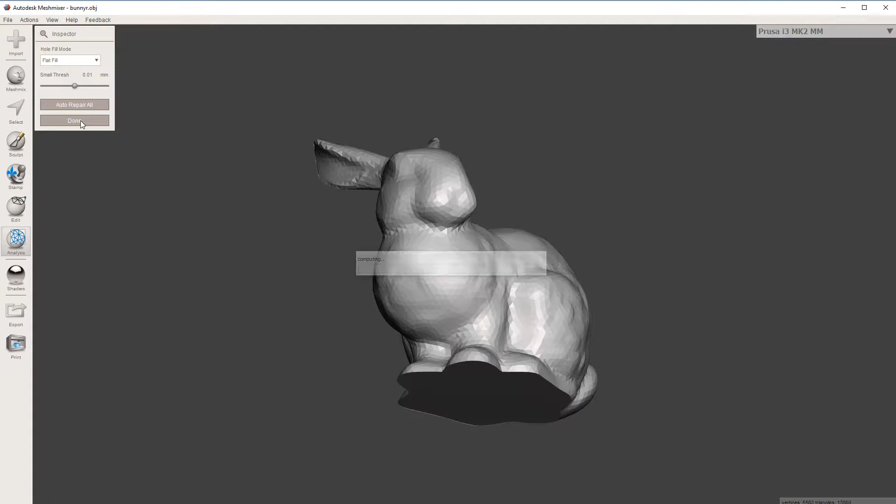Which was a Meshmixer question. So this Meshmixer question was kind of interesting, and one that I actually deal with quite a bit - how to align separate parts. So I'm going to take this part of the bunny right here, and rotate this and move it, and generally kind of totally mess it up in terms of where it is in 3D space. Now, a lot of times it's kind of very difficult to put things back together, but I want to show some tips and tricks on how to do some alignment when you have meshes that are in different places. Oh, actually, I'm not sharing my screen yet, but I will.

The reason this came up is we got a question about 3D scanning. Sometimes when you 3D scan things, the 3D scanning software creates different kinds of shells. It's the job of the software, whether it's fancy scanner software or something like MeshLab, to make sure the skins are nice and flat like this. But sometimes the skins are off and no matter how you scan or post-process it, they're not aligned - they should blend in like this, but they're not. They're kind of off. So how to get those down and perfectly centered on each other is what we're going to go into right here.

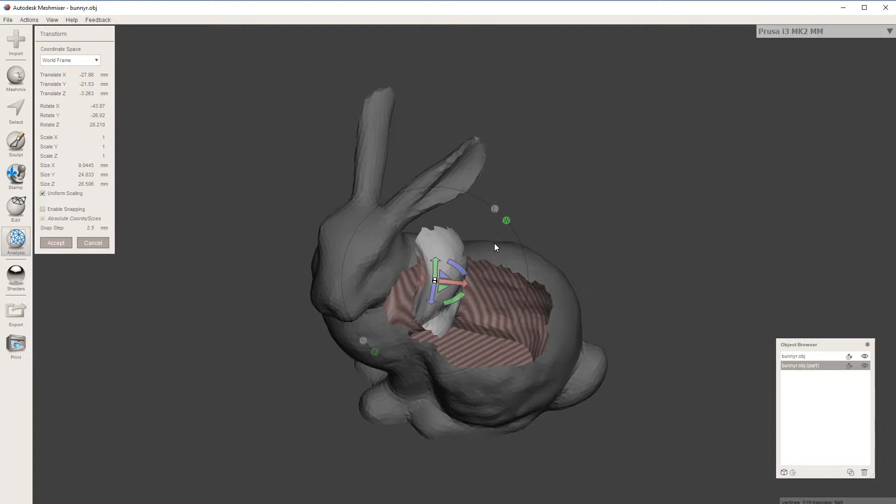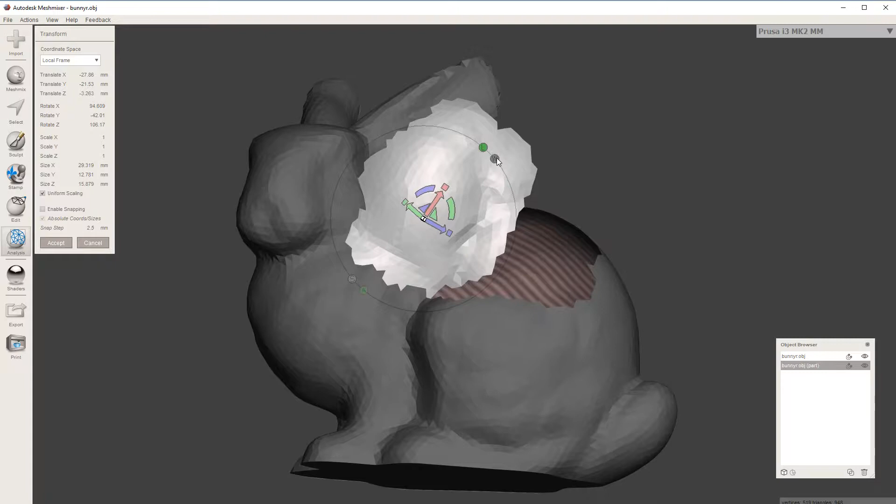A lot of this is because of the rotation system - even with world, the W, or L for local, your rotation systems are kind of off. Say I want to rotate this down - I'm looking at this bunny like this and I want to rotate it clockwise, but I'm not given the option of clockwise. It's only clockwise from this vantage point, but it's not working. If I go world, I get that, right?

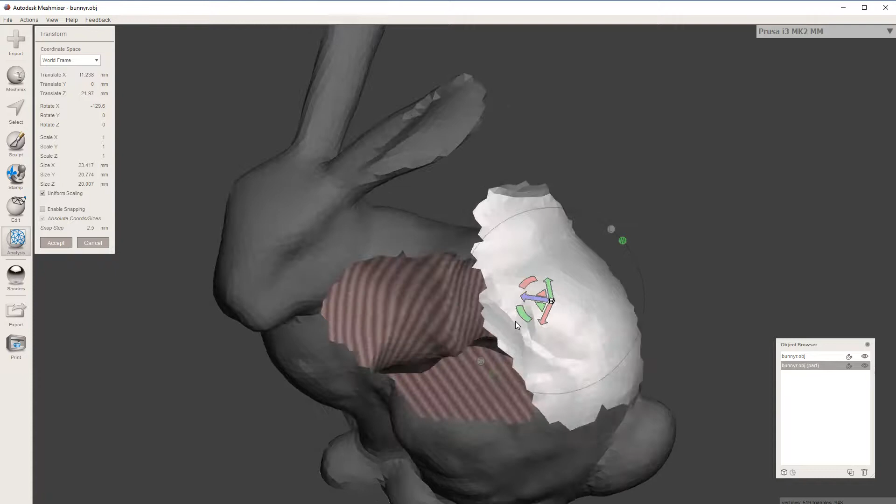Let's mess up the world to make this a little bit harder. Okay, right here, I try to do it and world doesn't work, right? It's kind of going into the wrong place. So the trick here is that you want to orient it vaguely in the right way, but you don't even really have to do that. What you want to do is, this is all about pivots.

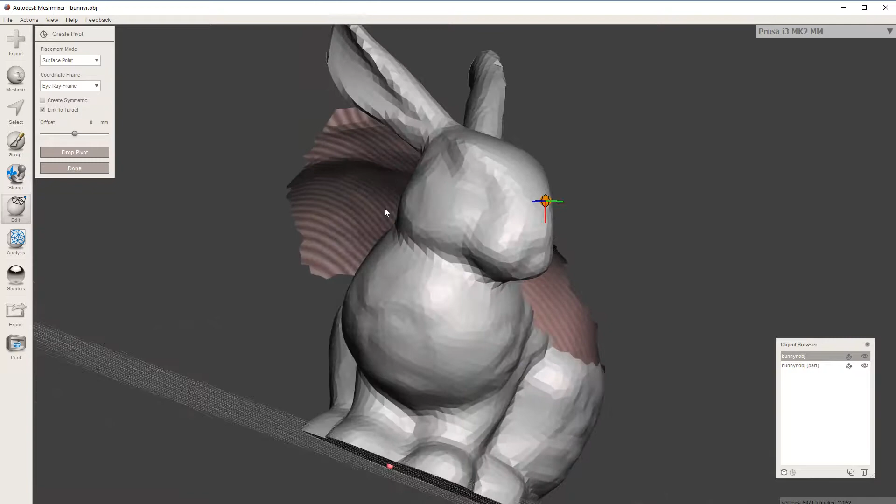So I'm going to go on the bunny and go to Edit to create pivot right here. The trick to this is that no matter where the bunny is - let me show the grid - no matter where it is, if it's on the grid, turned, or weird, you can use this trick: surface point, eye ray frame. So what this does, if I just click, I'm not actually placing a pivot, but as I click and rotate, this pivot, this green line, is pointing up. What this really means is wherever I click, that green line is pointing right towards me or you right now. As I rotate around, you can see it was pointing right where I was looking.

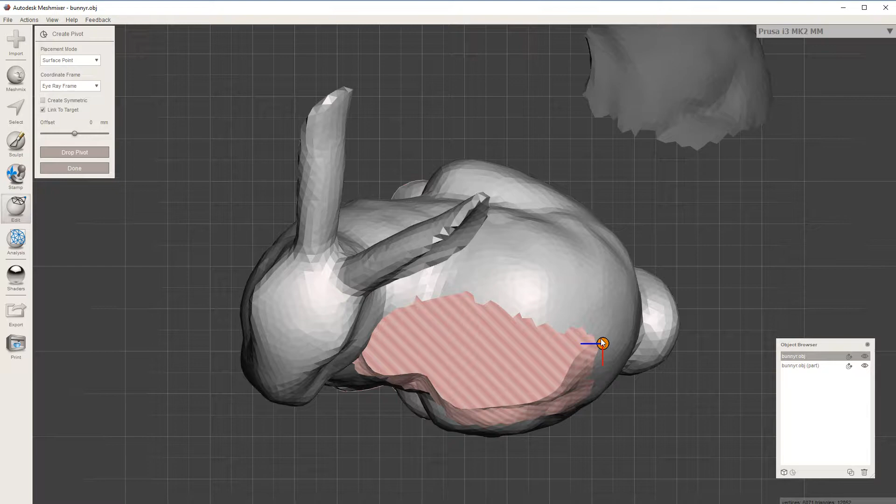So you can use that. You can say, well, I don't really know where the bunny is oriented, but right here on the back, I'm going to try to get it as straight up as I can. Another trick with this is to make sure snap is turned on. What that does is it will snap right there, bam, to the top. So what I'm going to do when I double click right now is create - you can kind of see a little bit here on the right hand side - this green line is facing absolutely up.

Now that is not up to where the bunny is, it is up to the grid right here. So that's great. I'm going to do the same thing for this piece, switch over here, move right over it, double click right on the back, go to edit, create pivot, surface point, eye ray frame, and link to target is very important to have, and double click.

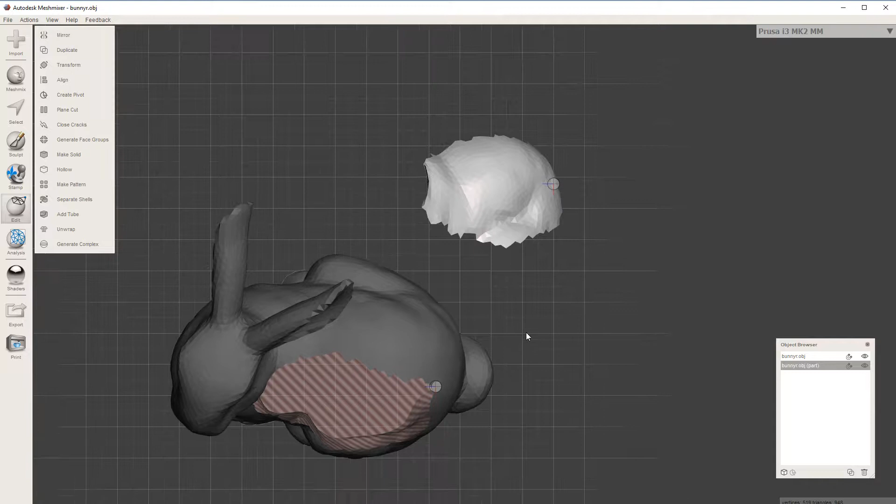Awesome, so now we have two pivots right here. You can also list the pivots if you look down on the right by clicking this little thing. These are pivots, so you can name them and all that. You can drag, if you're just clicking and dragging, you can drag pivot to pivot. So now those two things are absolutely matched, right? Those pivots are right on top of each other.

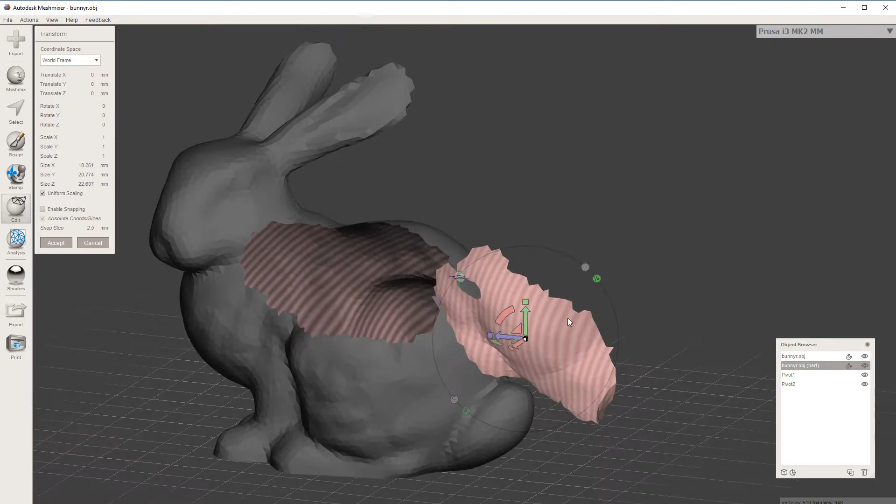The bunny is not right yet, but we'll get to that. If we click on this bunny part right here and click T for transform, you can see that the center of where this is moving is the center of this object. But that's not what we want. We don't want to rotate it around the center. What we can actually do is click on this pivot, and now this object is pivoting around that pivot point.

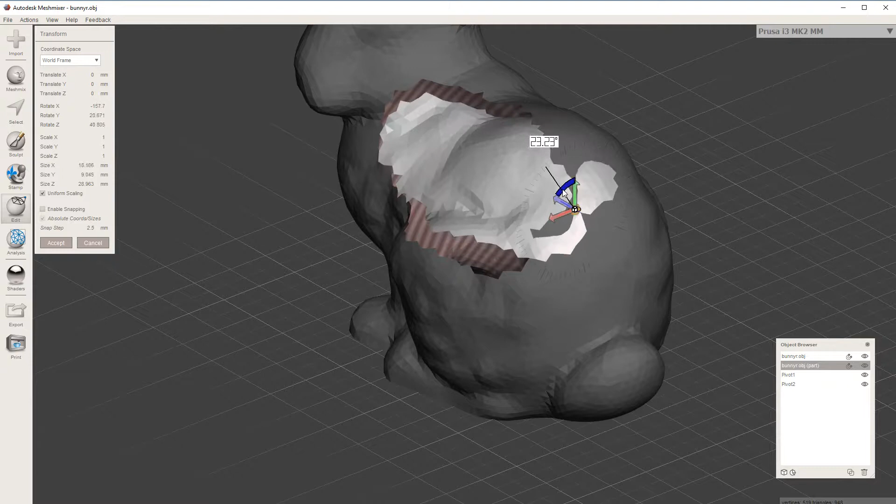So now we're up here, and you can see that because this is a world frame and I'm still on snapping, I can use this as a way of rotating this object much more accurately than I was able to before. I'm not saying I did this perfectly accurately, but it's a lot easier to move this now than it was before. And then once you get close, there are other tools inside Meshmixer you can use to really align this. But this is a darn sight better than I was able to do before, because of that center of rotation type of thing.

And now you notice that the pivot point is actually becoming a little liability because I'm not able to rotate it from the right place. I can always go and just create another pivot. Create pivot right here, and say I want it right there on the bunny, and hit T for transform, and then click on that pivot. And now I'm pivoting it from right there, or transforming it from right there.

Like that, and I've got it most of the way there, right? I can use some other tools now to do some bridging if I wanted to really bring that in, or if I want to be methodical about this, I can select both of these, hit combine. That's pretty good. And then click one side, click the other side, go to edit, bridge. It's created a little bridge there, as you can see.

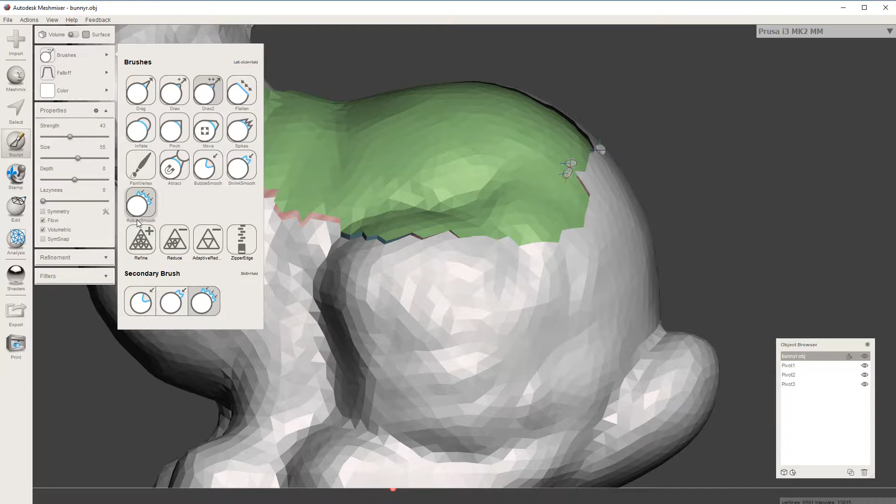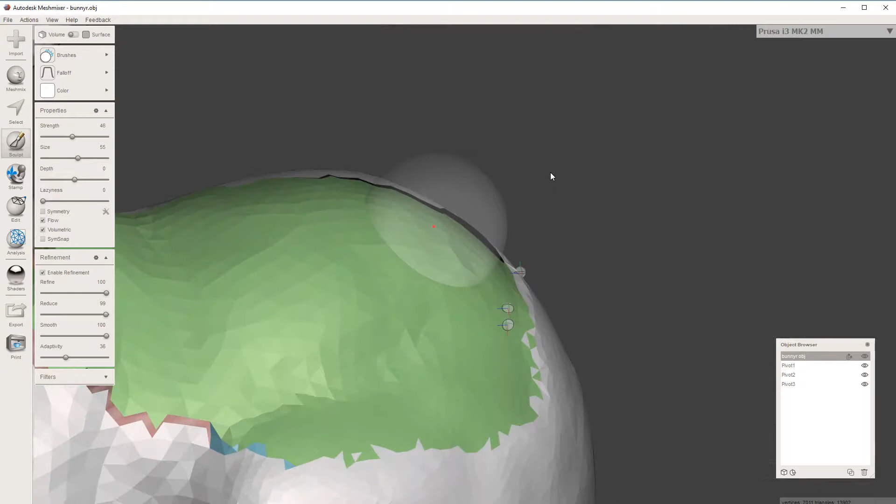And then one of my favorite tools for this is to go in with the robust smooth tool, with refinement turned up and reduction turned up. Watch this magic, I love this. This is kind of zippering those two edges together. You can kind of see they're broken, but the robust smooth is joining those two together.

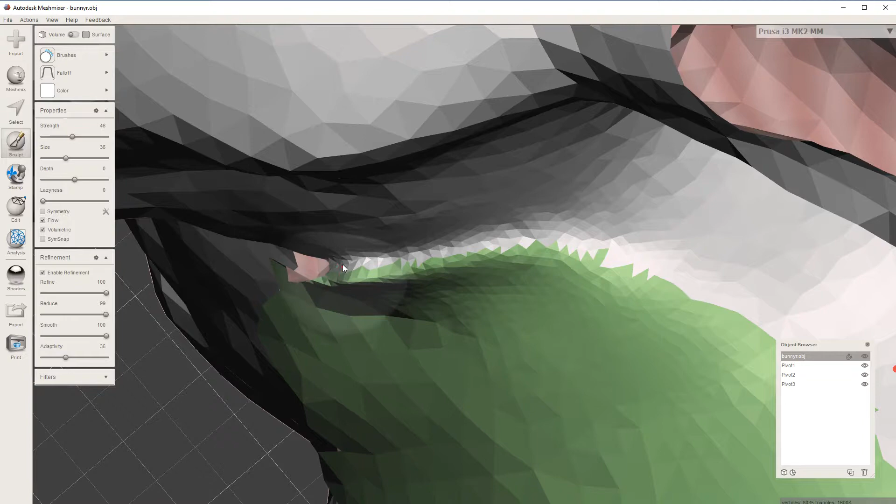I might want to make this a little bit smaller up here. It's a little more curved right here, so the tool has to think a little more on that, but it's getting there. In this, you want to make sure your brush is not too small to jump that gap, so you want to make your brush larger than that gap between the two sides, and it's just kind of zippering those two up like that.

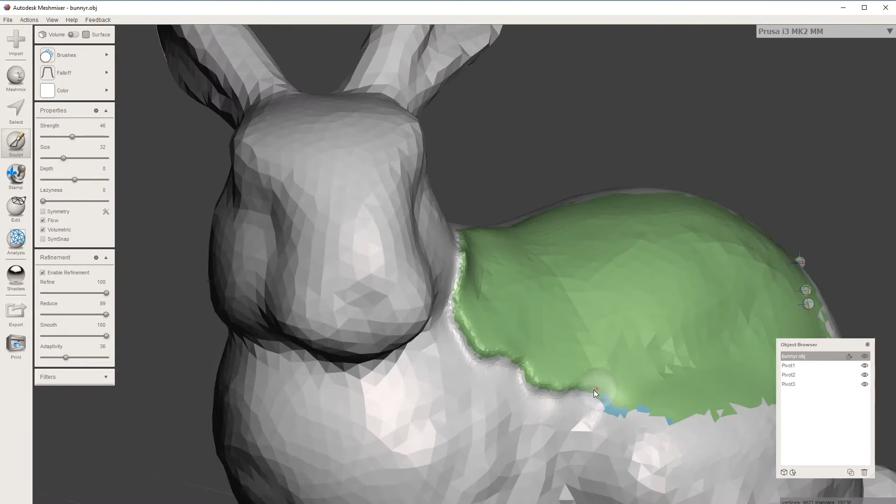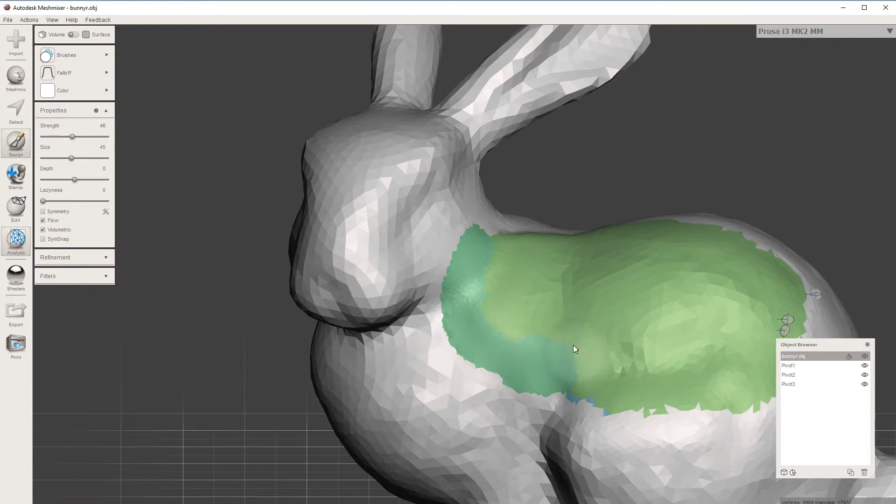Now if we look in the inspector, there's one tiny hole that we just fixed. There's some issues right there, but we can do smoothing in a couple different ways. Actually, a good way to get rid of this ridge is maybe just to select it, delete it, and fill it. Kind of nice. And then we can go back to the smooth tool to really smooth that out, like that. And it's pretty much back to where it was.

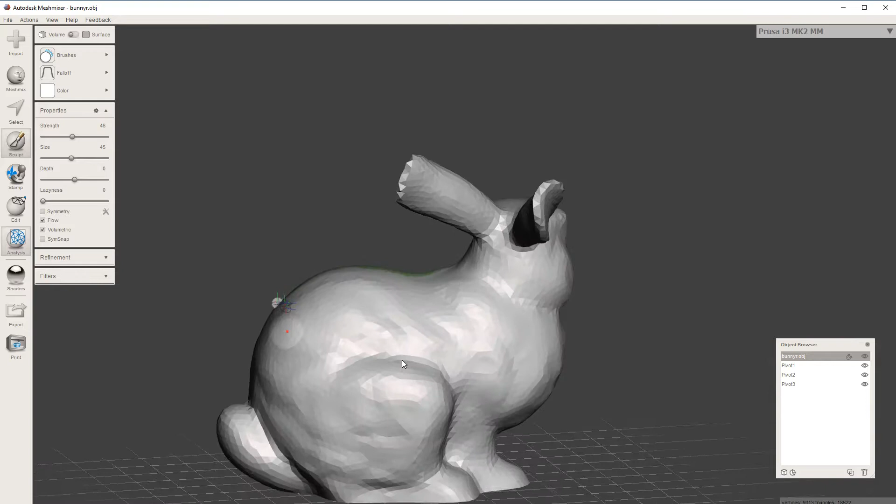So if we have something like this that I have separated out, I'll transform it a tiny bit away, and then bring that back into the bunny. Okay, now let me turn off the grid.

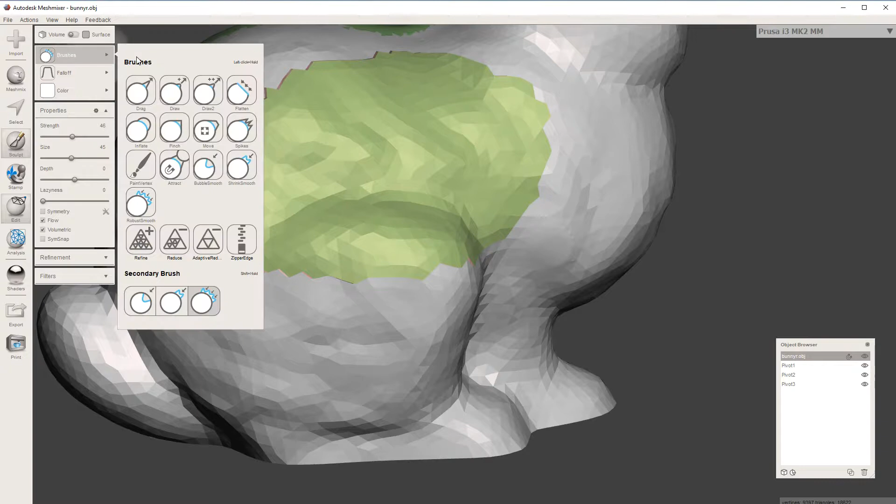Right now this is completely disconnected. If I try to go in with the robust smooth tool on both of these, it doesn't do anything - it just robust smooths this side, and actually looks like it hit the other side as well. So the way I did this is I selected one side and selected another, and then I went to edit and bridge.

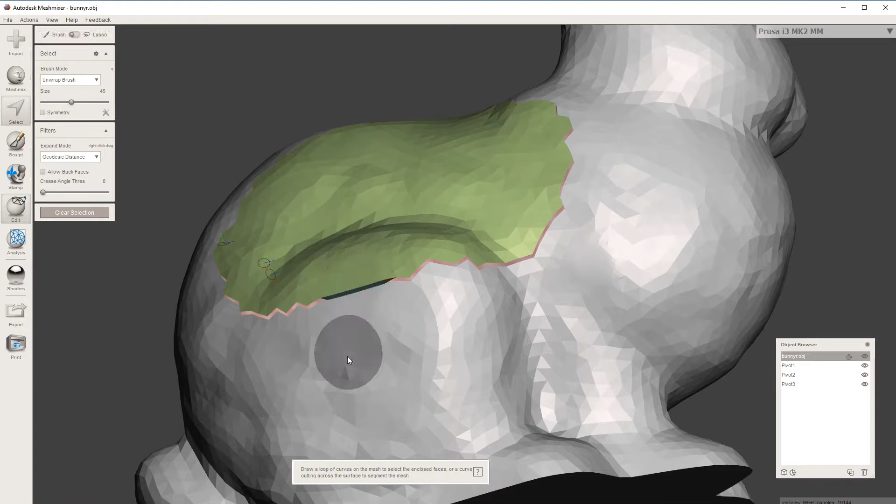Now that this has a start right there, if we turn on wireframe, now that it's the start of a connection there, the robust smooth tool will go do its little zipper thing, like that.

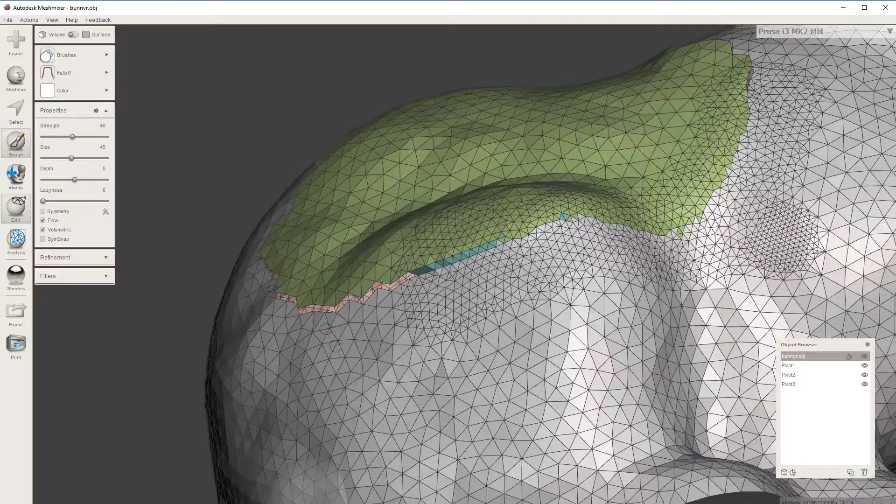So the robust smooth tool is - actually I can show you this way. If I go back here, it's not just the robust smooth tool, it's really any tool. If you go to draw like this, right? So draw creates volume, right?

But you see the draw tool is zippering that up as well. If you turn down the strength to 0, but refinement and reduction is still on - oh, it actually doesn't. Maybe just like a strength of 1. It'll actually start to do it, but you can see it's also adding volume at the same time.

So really all of the tools will do this if refine and reduction is on. That's what it does - it kind of fixes that gap in there. It's just that right now it's doing it while it's creating volume.

If I hold the control key, let me turn up the strength, that is undrawing, right? It's going away from you. You could do the same thing - you could undraw at the same time as zippering, and you're creating kind of a canyon right there.

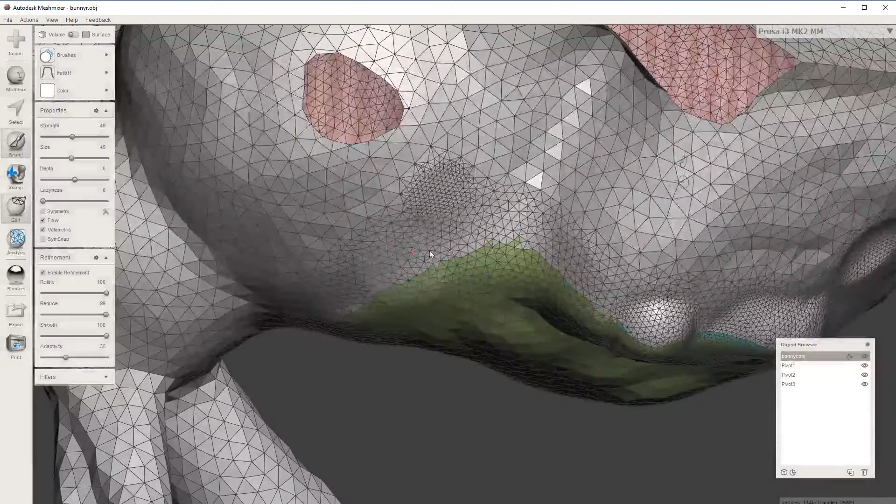But usually when you're doing this, you kind of want to do one thing at a time. So that's why I use the robust smooth tool - because it kind of averages out the ups and downs around the tool. So it's a really good way of zippering that without changing the geometry too egregiously, if that makes sense.

Good, so I hope that answered the question. That question was from Chris last month, so hopefully that helps you, Chris.

I also want to show you that we got a question, unfortunately, that I'm not going to be able to answer. Let me show you the thing here. Let me go into Thingiverse - I'm not sure if it's still on the front page or not. It is not.

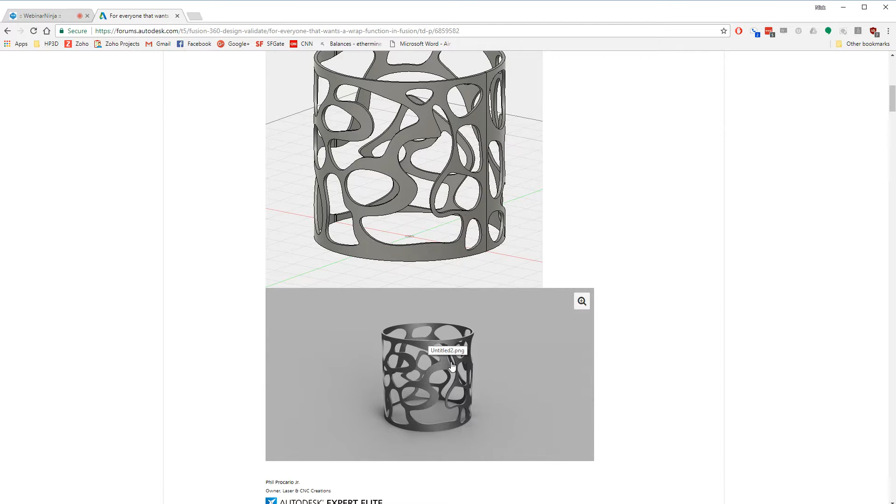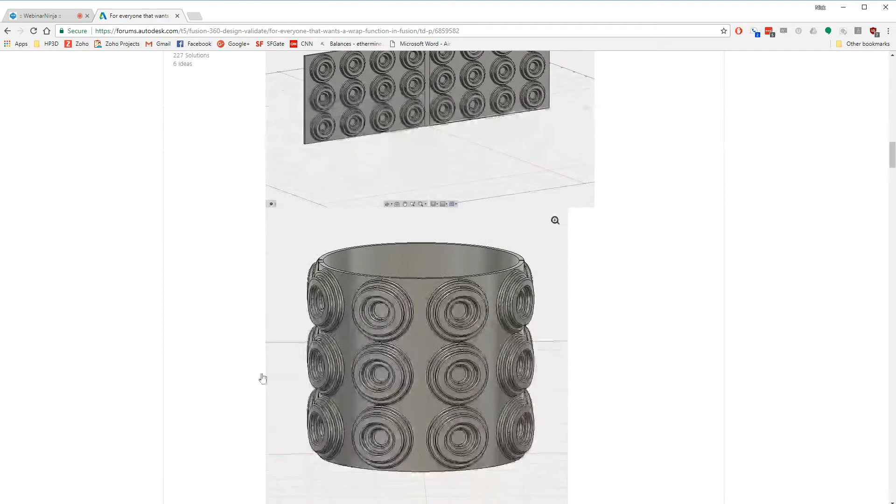Super, super easily — all this is, in the sheet metal workspace, is just a sketch drawn with splines and all of that, then cut out, but unfolded and refolded. If we go down, something like this is another example, just a sketch with different extrusions on it that turns into that. We've never been able to do anything like that inside Fusion before. Again, like this geometric pattern. But this only works with things that work with sheet metal. If you wanted this to be like a weird wavy piece of metal, it's still very difficult.

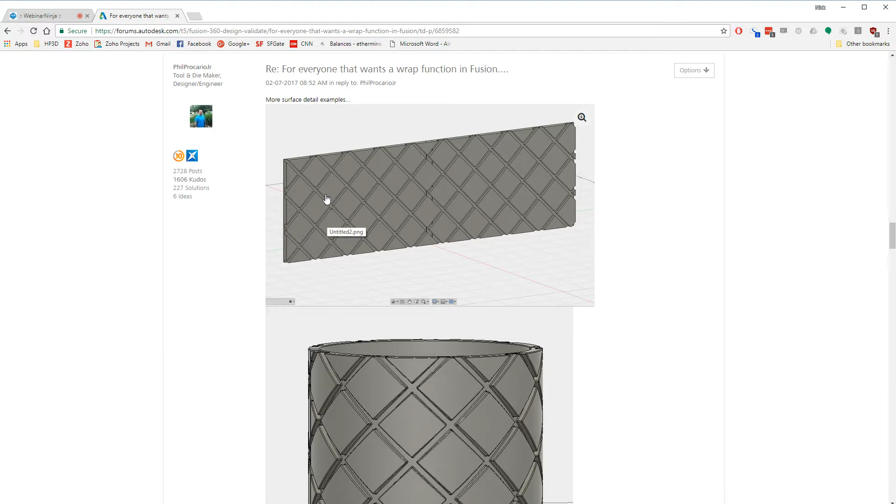I want to show you another example of this down here.

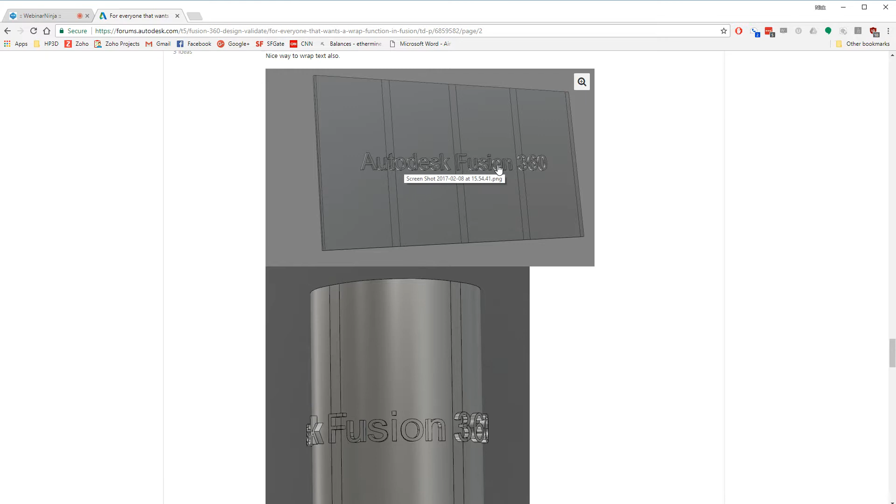There's one really interesting one that was done. A lot of cool things on this thread, but I want to show you, and this is doing the wrap all the way around. That's pretty easy. And actually how to create a kind of helix all the way around. This is very cool as well, and there's a lot of things you can do with this, but I want to show you very specifically one of these inside of here.

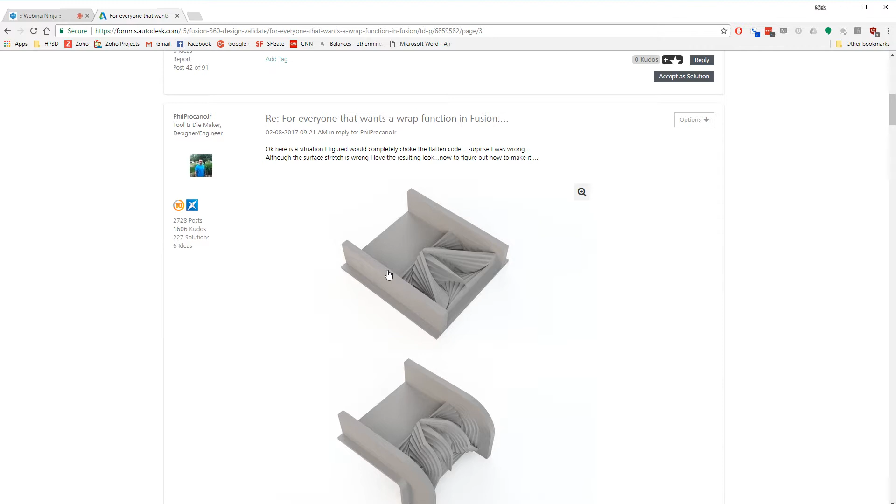Yeah, so something like this. This was created as something done in sheet metal, but it actually bent this shape around a curve, a very complex shape. If I can, I guess I can't.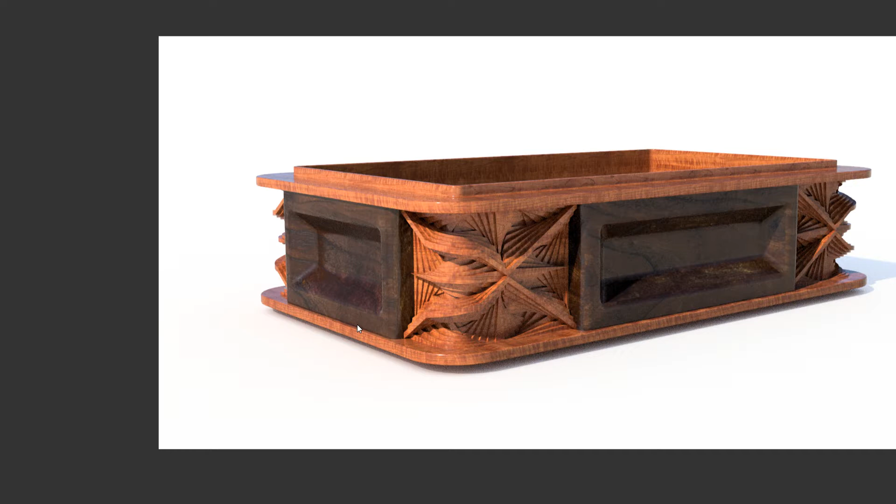You can kind of see that inside of Fusion. Another thing, they said this person took 5 minutes to create this, maybe not the design itself, but that is done in sheet metal, right? So it's a way of bending shapes around kind of flat bases, but those shapes could be terribly geometric. So I just wanted to let you know that with the new introduction of sheet metal...

I'm not sure if there are any other ones, and then people were doing things like bottles and all of that. With the new introduction of sheet metal in there, there's a lot of unusual use cases you can get, because sheet metal is all about wrapping, and you can do really cool things with wrapping, not just bending sheet metal to have it fabricated.